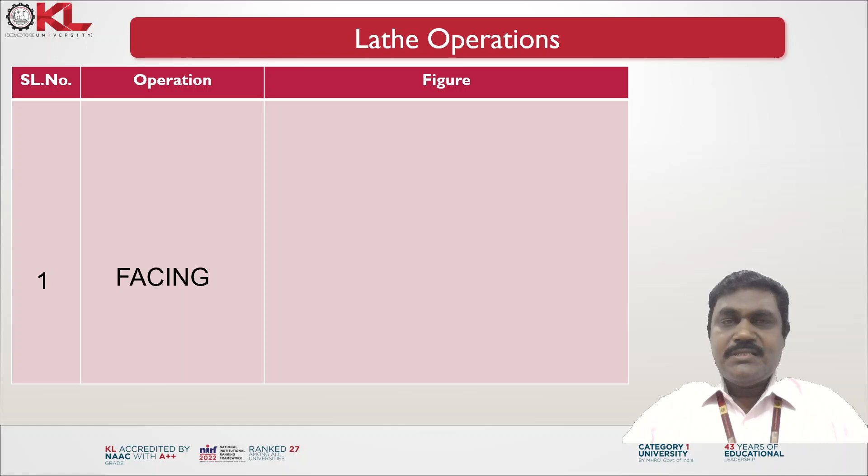Okay, in this video, I am going to explain the different lathe operations we are going to perform on the lathe machine. Now let us see the first operation, facing.

In facing, this is the chuck and we fix the job in the chuck. The chuck may be a 3-jaw chuck or a 4-jaw chuck. You fix the job, then use the single point cutting tool.

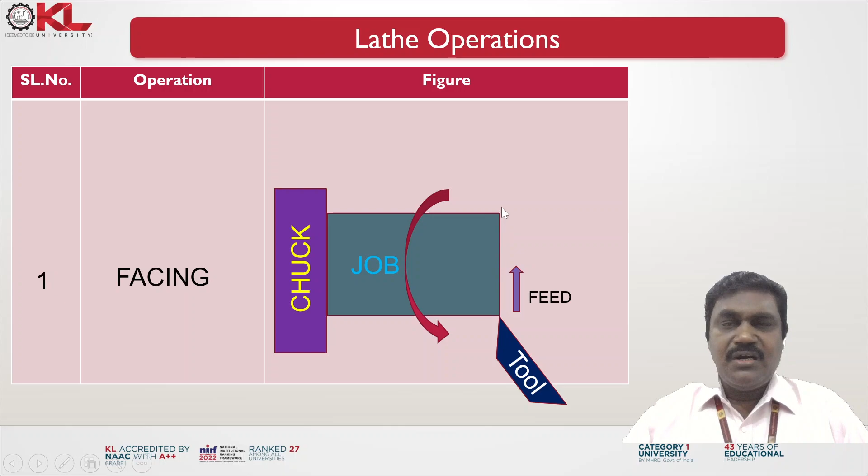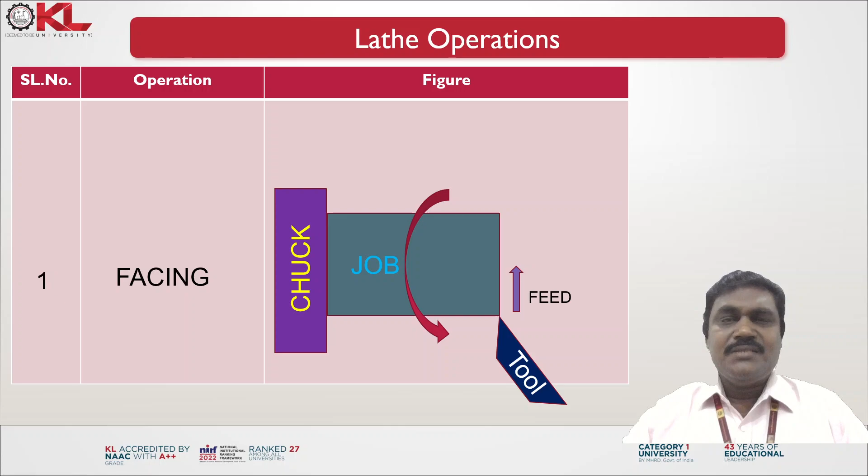Now the job is rotating in this direction. The tool will come and contact here, and the feed of the tool is perpendicular to the axis of the job. Then the required amount of material is removed from the face of the job, so this entire portion with the required thickness is removed. This operation is known as facing.

Then you perform the plain turning operation. This operation is used to reduce the diameter of the workpiece from the raw material diameter to the required diameter of the job. So for the entire specified length, material is removed to achieve the required diameter using this plain turning operation.

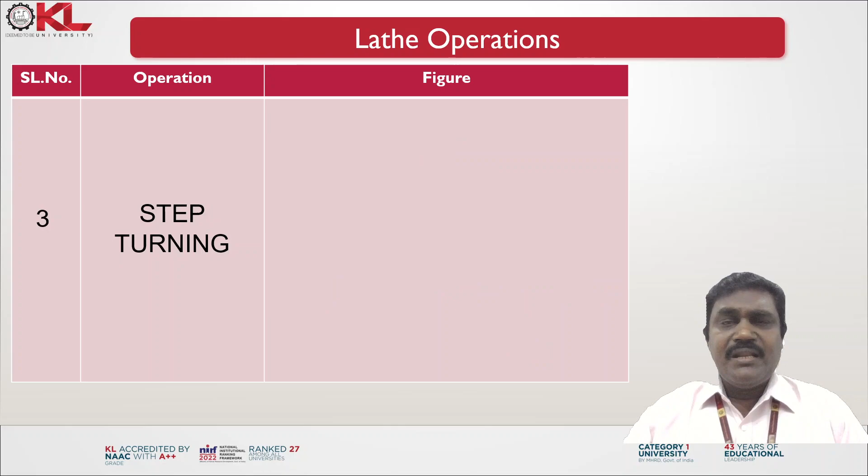Next, step turning. This is the chuck and the job is fixed on the chuck and it starts rotating. Now we want to remove this portion of the material, making different steps. That operation is known as step turning.

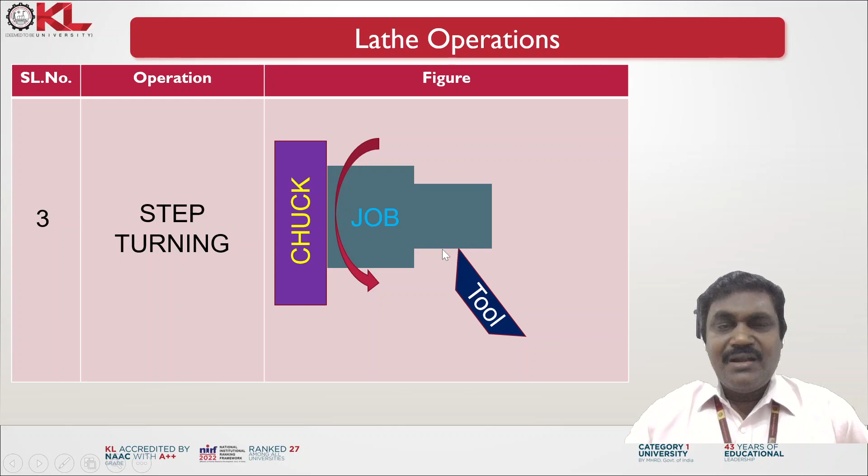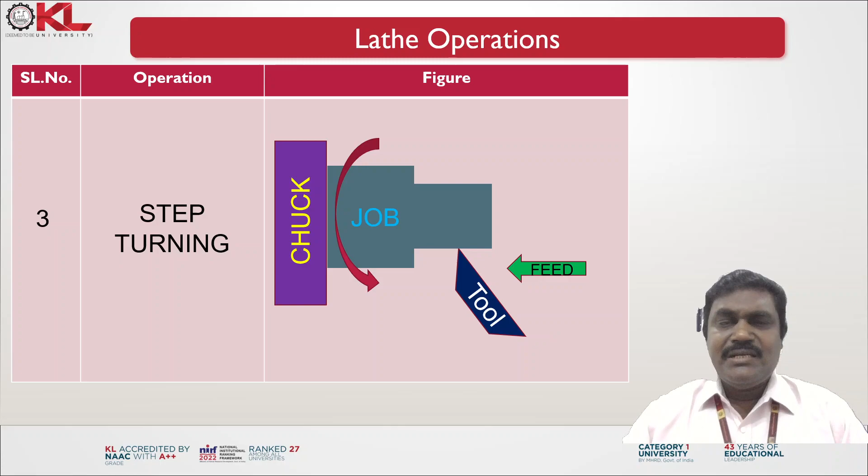The tool will move from this point to this point with a given depth, several times, to reduce the diameter from this diameter to this diameter. This operation is known as step turning, and here also the feed is given in the axial direction, to make different steps of the workpiece.

Next, taper turning. If you want to make a taper, again the job is fixed on the chuck and starts rotating. You feed the tool and it will move in this direction. Here, the tool is fixed in a tool post, and the tool post is set at a taper so that the required taper angle is machined.

There are several taper attachment methods available, so you can choose the suitable method to perform taper turning. Whenever the job is required to reduce in diameter on either side to different diameters, you perform this taper turning operation.

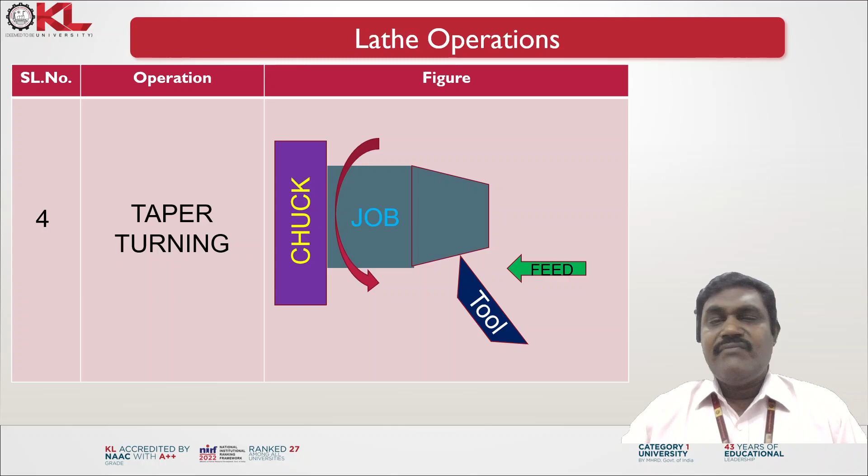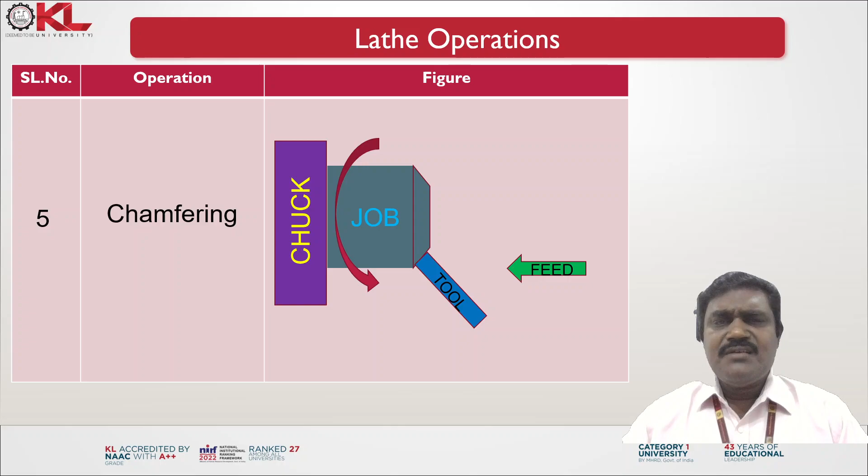The tool is fed on the edge of the workpiece, to the required chamfer length, to perform the chamfering operation. Generally this is performed after completion of the job, in order to reduce sharp edges at different steps, modifying them so it saves the tool and avoids damage to either the operator or the mechanical elements. This is known as the chamfering operation, and the feed is also in the axial direction.

Next is knurling. Whenever on the top surface we want to make some impression to increase friction - some handles provide a specified design on top for this purpose - without losing the plain surfaces, we operate this tool to produce the required impression on the surface of the workpiece. That is known as the knurling operation.

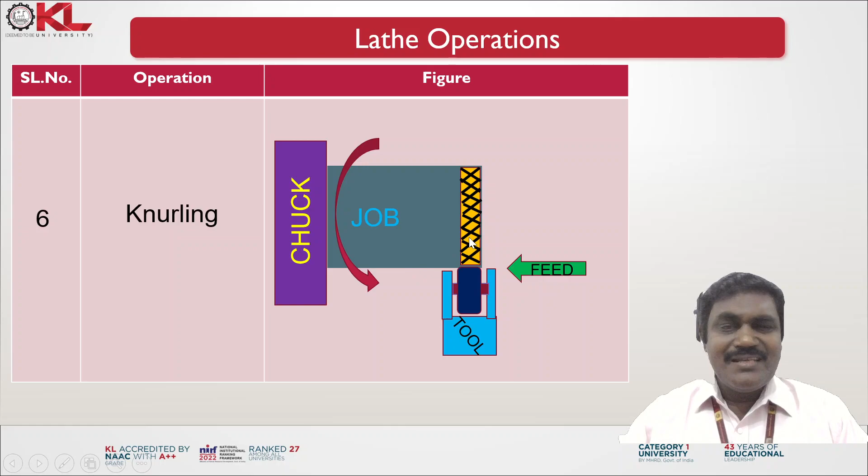Now let us realize the knurling operation. This is the knurl tool. Once the tool impresses on the surface of the workpiece, whatever design is on the knurl tool will be impressed onto the workpiece. Feed is also given in the axial direction, for the required length you want the design to appear on the surface.

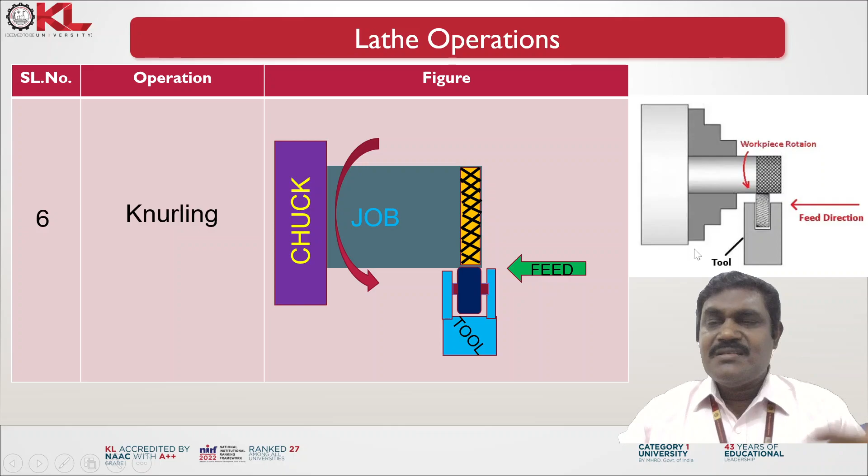The workpiece is fixed and starts rotating, with the feed direction of the tool - this is the knurl tool - producing the same impression on the surface of the workpiece. For more illustration, I've explained with another figure how the impression takes place on the surface. That operation is known as the knurling operation.

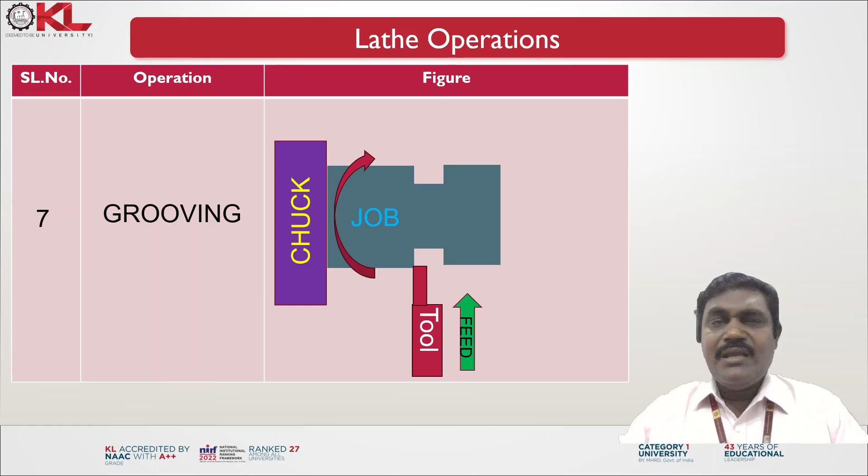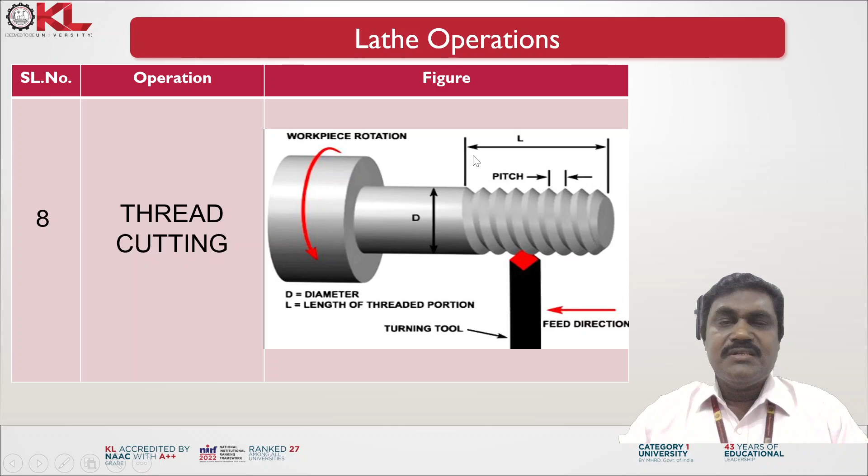Once the workpiece starts rotating, it moves in a helical way and a helical groove is cut. You perform it multiple passes so the required depth is obtained - first pass, second pass, third pass - each time following the same groove designed by the pitch. This operation is known as threading. For this tool, feed is given in the axial direction, while depth is given in the diametrical direction, up to the required length.

Next, forming. If you want a specified shape required on the surface, earlier groove turning was a plane, but if you want a certain shape or profile, you can use the forming tool. You choose the specified forming tool to perform the forming operation.

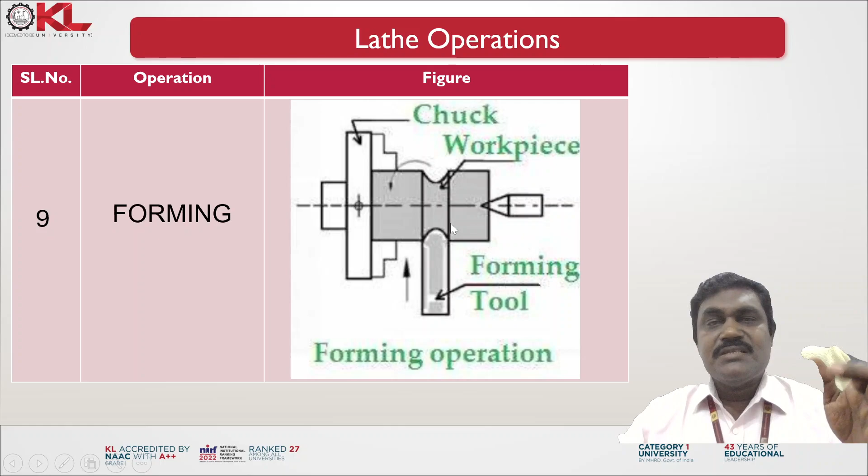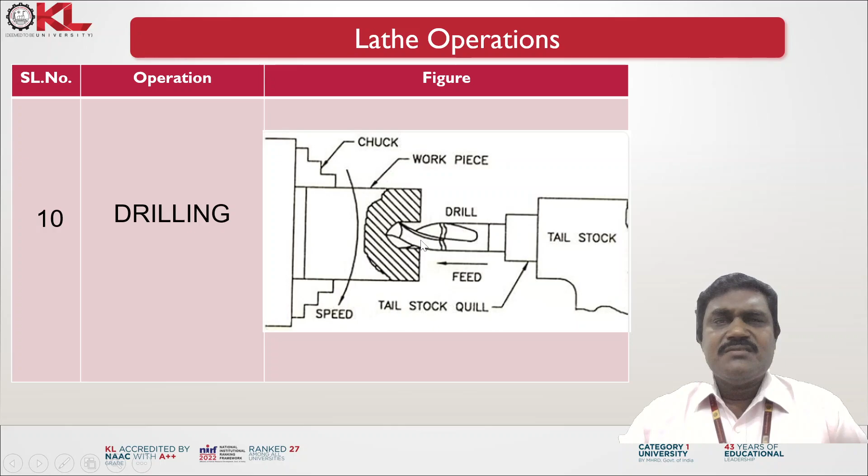Next, drilling. You can also perform drilling operations on the lathe machine. The job is fixed on the chuck and the other end on the tailstock, where you fix the drill bit and move the tailstock axially. The drill bit is fixed and not rotating; only the workpiece rotates, and the drill bit feeds against the rotating workpiece in the axial direction, so drilling can be performed. The diameter of the hole depends on the diameter of the drill bit chosen, and the hole is made in the axial direction.

Next, boring. Boring is used to enlarge an already drilled hole. When we want to enlarge the hole because the required diameter of drill bit is not available as a standard size, you can use the boring tool to make the required size of the hole, enlarging the already drilled hole up to the required length. That operation is known as boring.

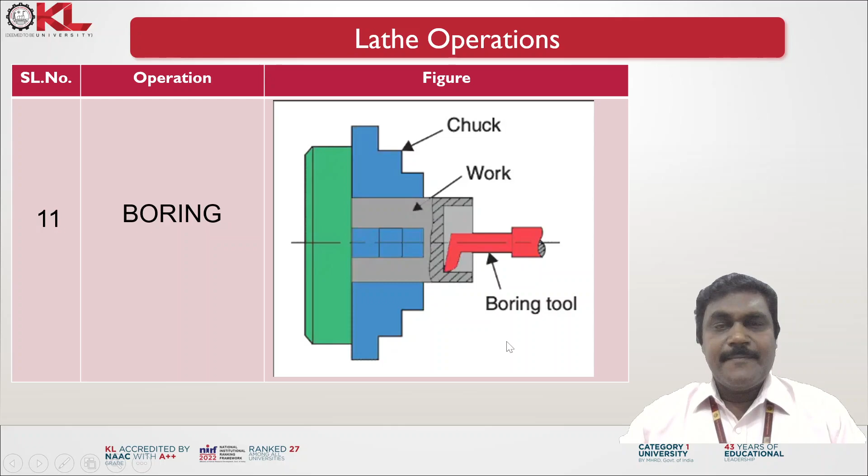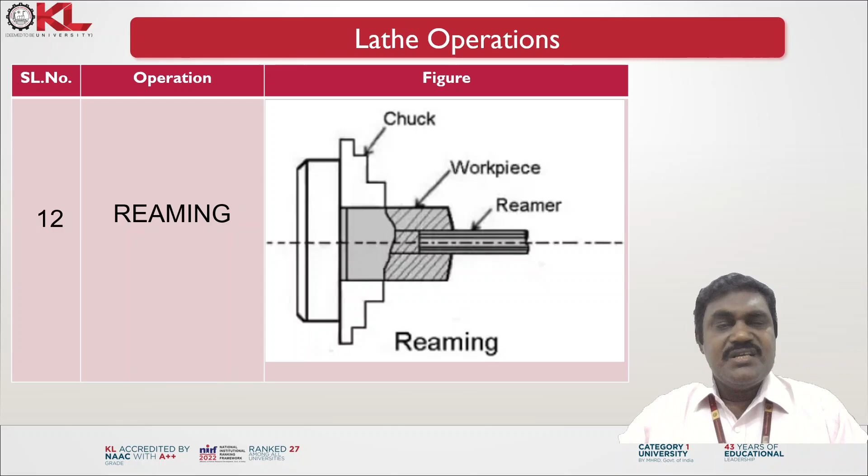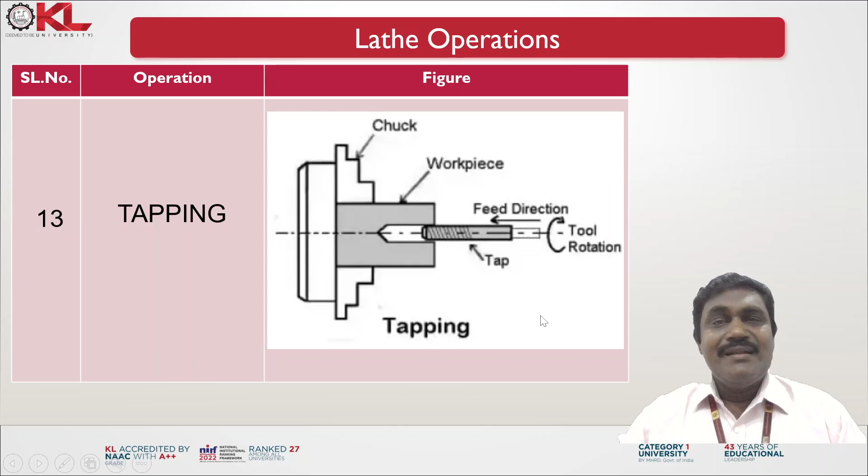Tapping. When an already drilled hole needs an internal thread, you use the tapping tool. The workpiece is fixed on the chuck, and using a drill bit with the tailstock, the hole is drilled first. Then the tapping tool is rotated on the workpiece, so whatever thread is specified on the tapping tool is machined onto the workpiece. This way internal threading can be performed, and this is known as the tapping operation.

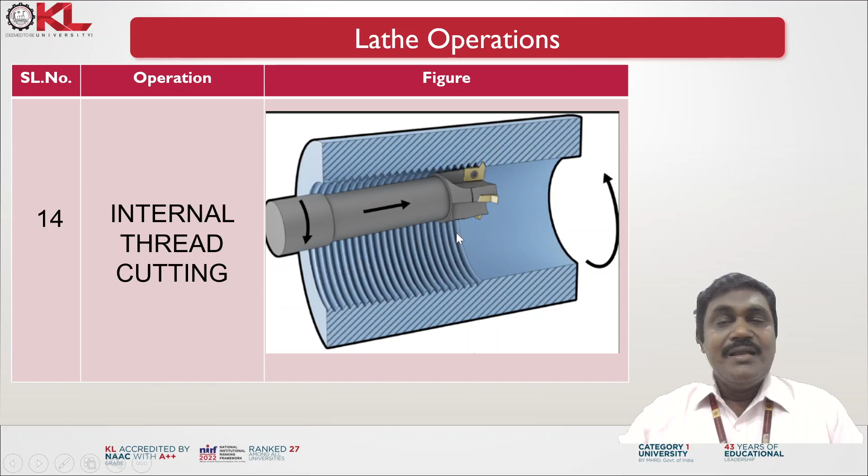Next, internal thread cutting. You can use a specified tool to make internal threads, similar to how external thread cutting is performed. These are the few operations that can be performed on the lathe machine. I hope everyone understands the different operations that can be performed on a lathe machine.